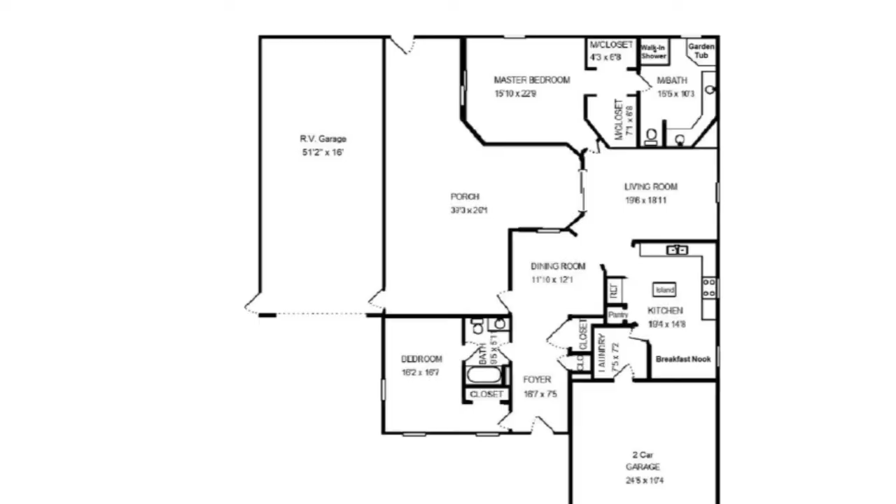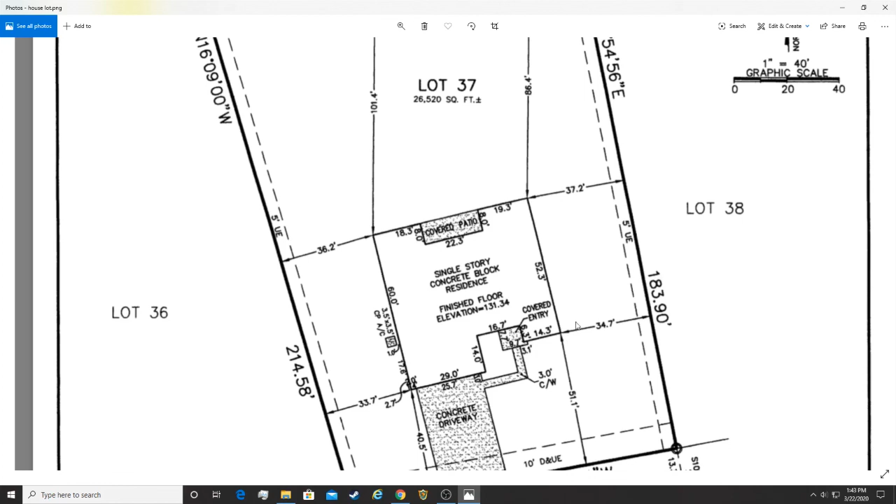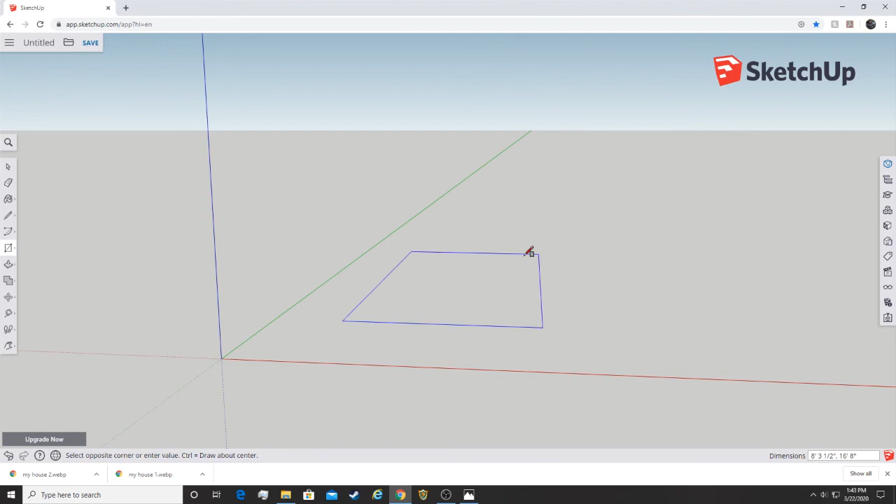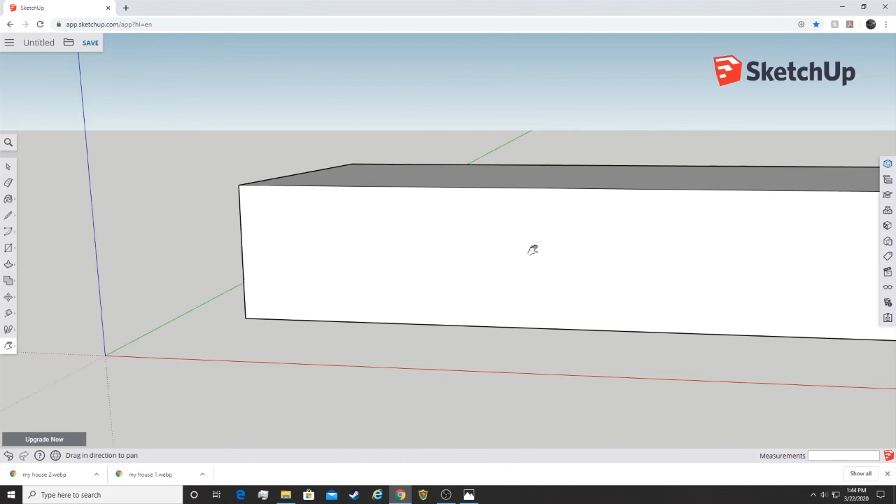All right, let's go ahead and start building this in SketchUp. Really good little start. I'm just gonna get these little boxes over here - by no means am I good at this, but we could figure it out, I guess. So we need like a 60 foot... how big is this box? Is that 60 feet right here? Anyway, I'm gonna cue the music and let you see the progress of me building the house.

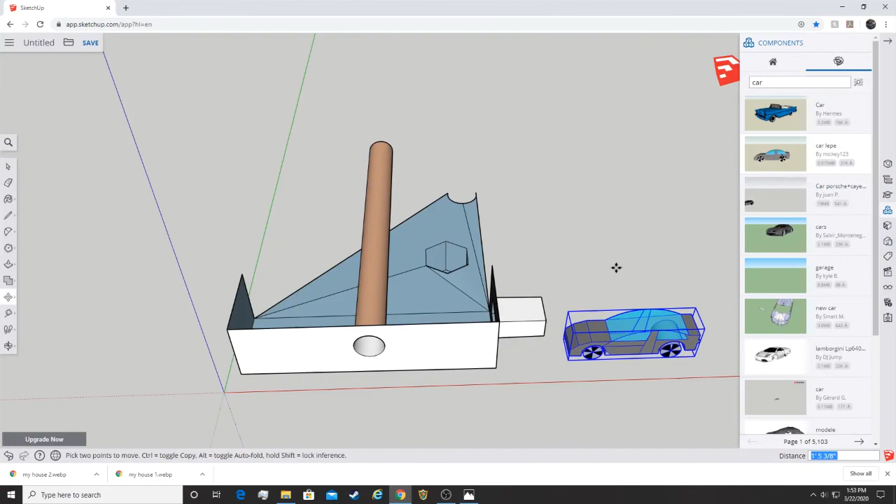Okay, so with a lot of learning and digging around, I think we have something we can turn in now.

This is 24 foot right here by 16. The garage door is 20 foot by 14. This is like a 4-foot rooftop overhang - I don't know if you call them eaves or something - but 4 foot so we can do water drop off. I've been told the challenge is going to be water runoff right here. That's a big worry, so we'll have to create some type of slope to have the water drain back, because you don't want water just sitting there. I'll also have an eave on here for that.

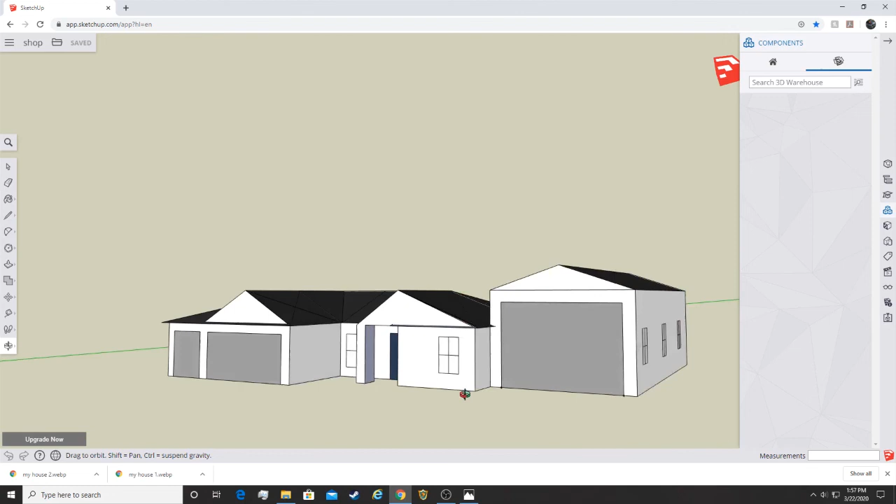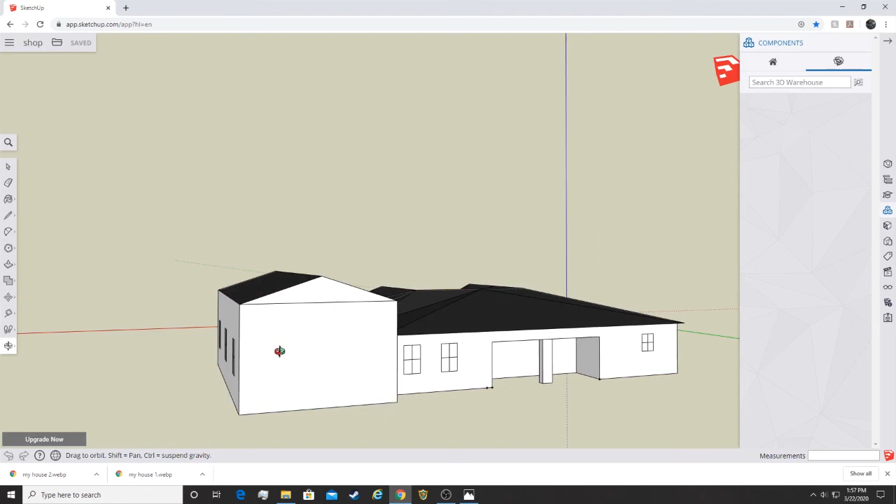But I'd like to hear you guys' feedback. Should I put windows on the side here or not? Kind of up in the air. Do we just put something in the back? Do I put a garage door in the back, or is there a door here? I don't want to lose additional wall space if I do have a door here, because I can't really use that wall as workshop space.

But I'd like to hear you guys' feedback on all this stuff. This is exciting for me, and again, it's the beginning stages. Kind of wanted to get your thoughts on it - maybe tell me no, this sucks, get a new house, whatever. But I know this is probably getting pretty expensive. Just wanted to get your guys' thoughts on it.

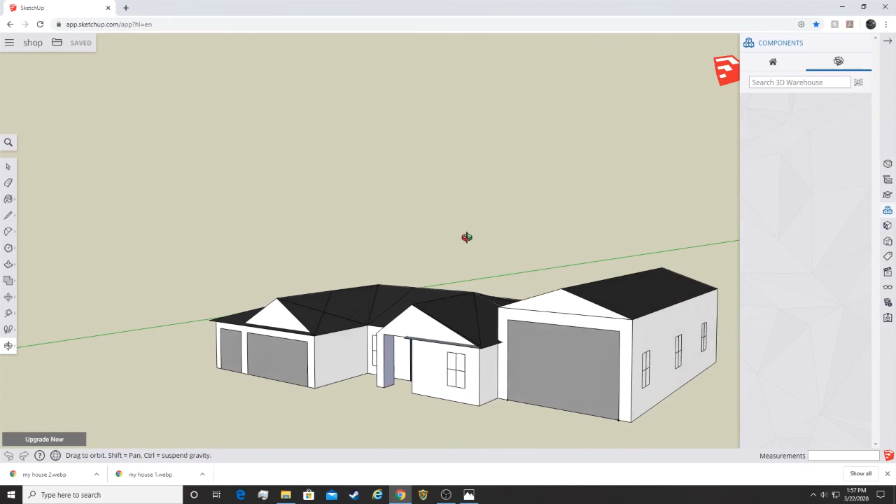A lot of car guys out there, their dream is to have a shop where you can have a lift, and my goal is to have a lift in here. That's why I'm going with the height I am. So guys, give me some feedback - is this a good idea? Recommendations - if you guys build stuff like this for a living, let me know. I'm open for ideas if I need to tweak some of this.